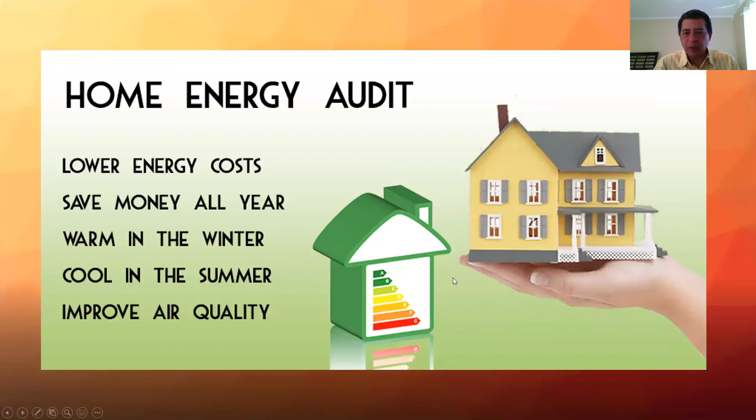The first thing he or she will expect is a lot of questions from the energy auditor, because the owner is the one that knows the home better than anybody else. So one of the things the energy auditor will do is first have a conversation with the homeowner, asking if he or she knows areas that were ventilated, which areas of the home are colder or hotter during winter or summer time, things of that nature.

Once that's done, the auditor will do a physical inspection of the home. He'll do a walkthrough outside and inside. Everything has to be accessible. Every single room of the home should be accessible - attic, basement, bedrooms, everything. Every area of the home has to be accessible to the energy auditor in order to have a quality audit performed.

They should also expect them to have some equipment like the blower door, for example. The blower door is just a big fan that they put at the main door. What that does is put your home in negative pressure. It's like having - don't be afraid of what I'm going to say - a 50-mile-per-hour wind coming inside your home. You're not going to feel it that much, but that's the pressure we bring your home into. So what that does is pull air out from inside your home.

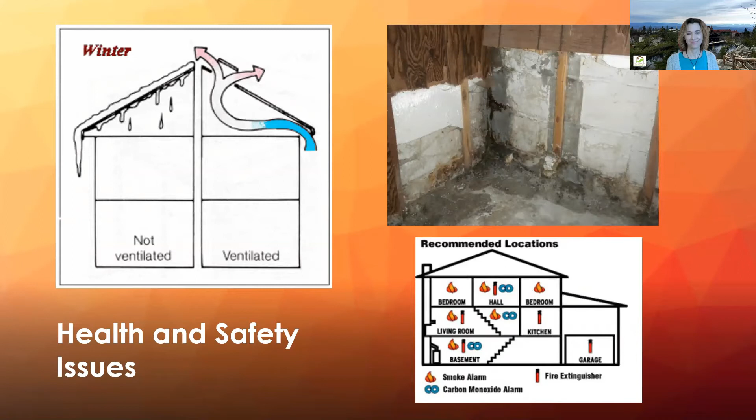Well, ventilation is part of the whole assessment. And yes, you're right about that. That's the popular saying, my home needs to breathe, right? We all need to breathe air. Well, the home needs to do that, but to a point where we have to give that breathing of the home in a way that is healthy for everybody.

So when you do, like in the picture that you're showing there, in the winter, all that dripping in air and things like that, that is because the moisture inside your home that we generate every day when we take a bath, when we cook, when we even breathe ourselves. We're generating moisture that goes with the air somewhere, and it's that movement inside the home. So when you have infiltrations between your living area, which is the envelope that we're going to talk about later, and it goes into another area, and there's condensation, well, it creates things like the one on the left, where all this dripping is going, the water is condensing, water gets there, then that contributes to mold-like substances and things of that nature.

The one on the right has proper ventilation where everything moves, the air goes, there's a seal, there's no connection between the home and the cold area of your attic, but that area is breathing and moving all the air. So those health issues like the one on the left are addressed. So yes, ventilation is part of that assessment, not only the energy, but the health part of it.

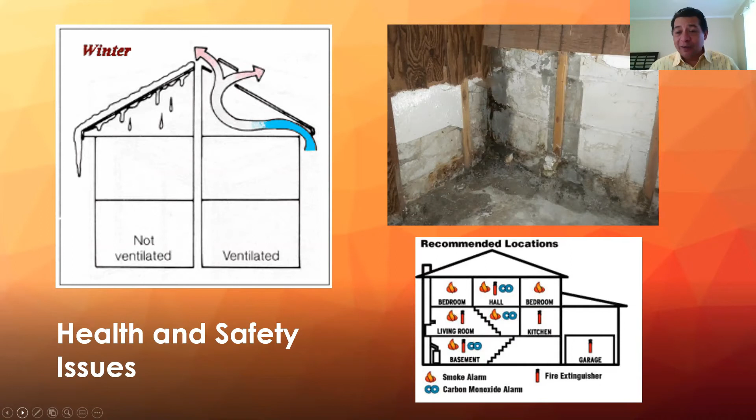Right, and that's only one part. We could talk all day long about it, Marcia, I know, but we don't have time for that. All right, let's go on to our next slide.

And when I say holes, I don't want people to believe that they have big openings in the roof or things of that nature. But basically, that's what it gives us, those little holes that when you add them up, is where the air gets into your home or gets out of your home, depending on the circumstances.

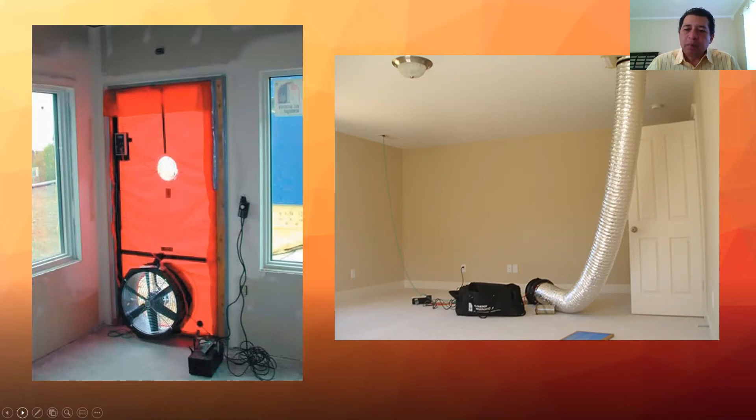What it's showing is where the hot and cold spots are in your home. If it's cold outside, when you do the infrared camera, it will tell you that. By the way, most of these are done while you have the blower door running, because you want to create that difference between the outside and the inside of your home. In general, the greater the temperature difference between outside and inside, the better picture you get of what's going on in your home.

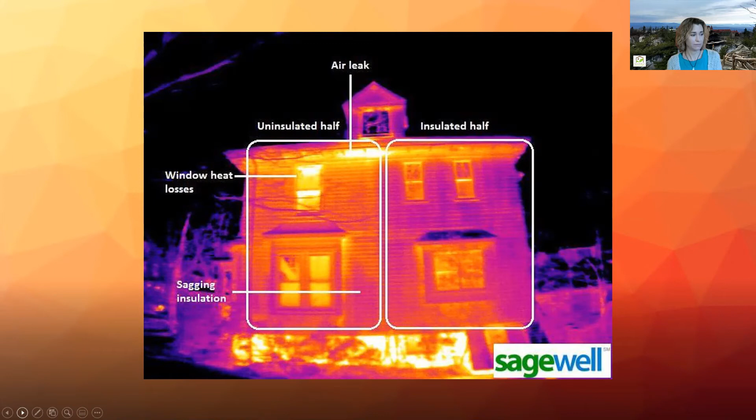So that says the hot air inside your home is heating your walls. Shouldn't be heating your walls, right? It should just be hot inside your home. So that tells us those walls most likely have no insulation. They have a lot of air infiltration because the heat is going through all those holes we're talking about into the wall and heating that wall, and not only heating the wall but also escaping to the outside where it's colder, because that's physics. Heat goes from the hotter area to the colder area, works that way every single time.

So you can see the giant air leak here, air leakage in there, it will blow in there. And if it's cold air, that thing will be very, very cold, very dark, like a dark spot, because it's cold air infiltrating. Most likely this one was done in the summer because it's hot air that's coming in there.

On the other side you see the difference of color, right? The other half, insulated, is more like a purple, darker color. That tells us the walls are colder than on the other side, which means the heat is not moving through as fast. So the heat is staying inside your home.

And this, I want to point to the windows. You see the windows? What color are they? They're orange, okay? Why? Because windows, going back to the same thing, they're not great insulators. They're not great at holding the heat inside your home, because they're not.

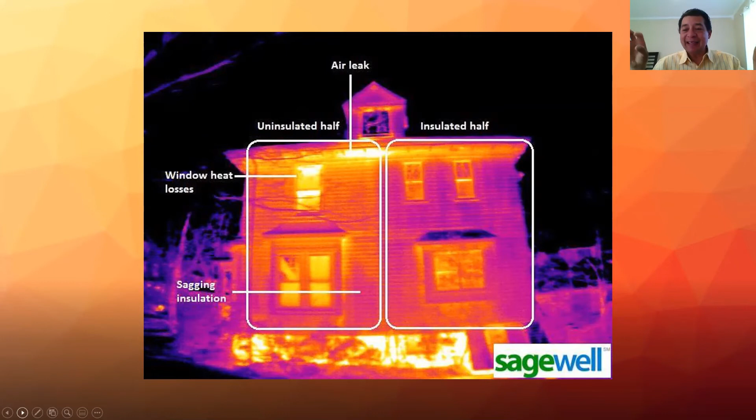So what we do in a practical sense is we block off those easy exits for the air, so the air stays in your home.

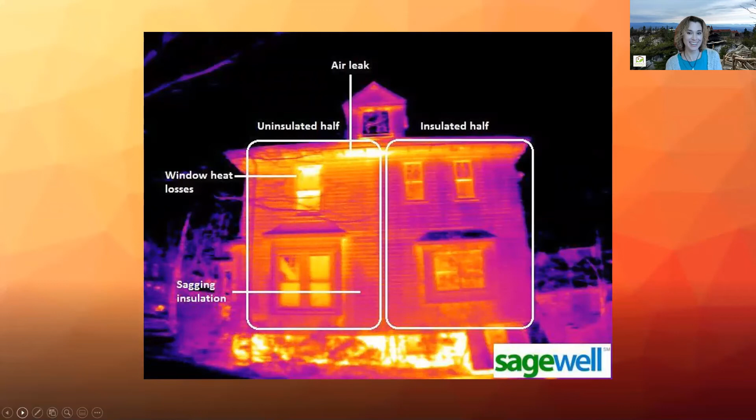Let's go on to LED lighting - what an easy improvement that you can make in your homes, and save so much.

I can tell you that I changed out all my halogen bulbs and incandescents for LEDs, and I've saved in just one year like $120. Easily paid for all of those bulbs. And if anything of all this, everyone right now listening to this should be doing this. Go through your home, look at how many light bulbs you have, and just do this investment. I assure you that by doing it, it's going to pay you back 100-fold in energy savings.

Nowadays LEDs are so inexpensive. It's not like it was at the beginning when they were coming up, when an LED light bulb was $20 for only one light bulb. Now you find light bulbs for $3, $2, $5, $4, depending on the light bulb that you want.

But if you want to do an improvement right now that will help you, and I agree with you Marcia, let's just do that - change your light bulbs for LEDs, and that will help you immensely. And all those factors - longer life, eco-friendly, energy efficient. On top of that, you're helping the environment because you're not wasting more energy. We're not burning coal, we're not doing a lot of things, because less energy is being used in your home. So yes, LEDs, I'm all for it.

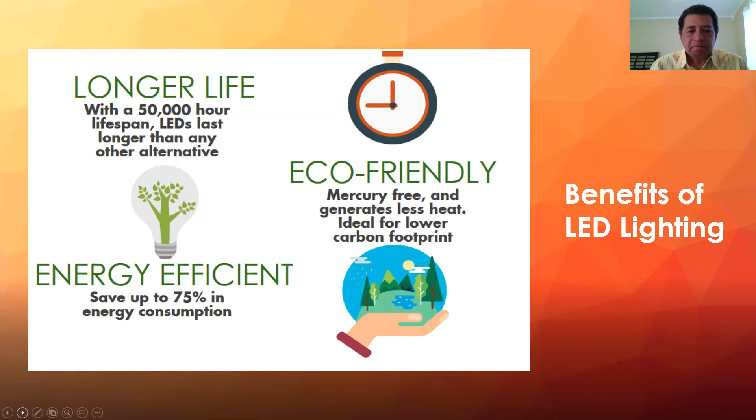Yeah, and you can go on Amazon - I think it was 10 or 12 of the replacement bulbs for the recessed lights that I had in my home, and it was like $68. It was really inexpensive compared to what they used to be. So definitely check that out.

All right, we're going to have to go through this really quick because we don't have a lot of time left. People may hear the terms HERS and HES and wonder what that is. Well, this is just a system that tells you how efficient your home is. HERS was done by the Residential Energy, the ResNet network. It tells you how energy efficient your home is. In this system, when you hear HERS, the lower the number, the more efficient you are.

With HES, that comes from the Department of Energy, and that's vice versa - the higher the number, the more energy efficient your home is. Basically both of them just give you an idea of where your home is on energy saving. So if you hear about this, just know that with HERS, the lower the number, the more energy efficient it is, and with HES, the higher the number, the more energy efficient it is. Now, is this a number you're going to get after a home energy audit is performed? No, we don't provide these numbers.

But what we do is tell you, you're going to have a lot of energy savings, and we will project what that will be based on your own consumption.

I'm curious, if somebody wanted to know these numbers for their house, how would you get them? Do you have to hire a ResNet rated auditor? Yes, sometimes you do, but what they do is a brief evaluation of your home and give you a number. They're not auditors doing a full audit, they're just evaluating where your home is, and then they assess what that is.

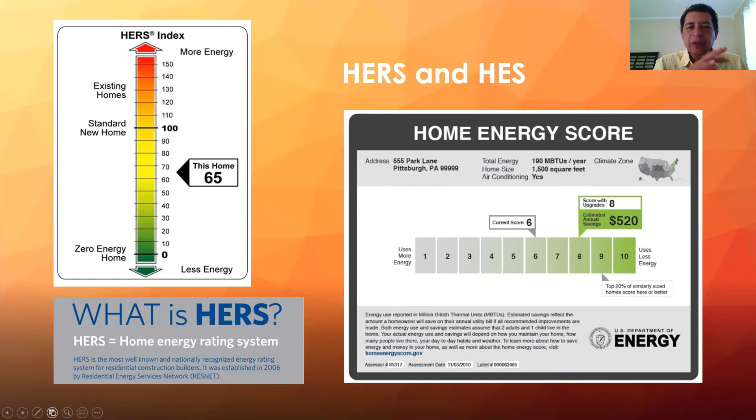And if somebody weren't able to get the free service, maybe because there's a backlog and they don't want to wait around, they can hire an auditor. What typically would that cost? The cost runs between $400 to $700, depending on the house size and everything, but that's the average.

So that would be equivalent to if a buyer is buying a new home and doing a home inspection. That's very typical for that range to have a regular home inspection done. So as a realtor, I would tell my home buyers to just plan on saving that money and getting the home energy audit done right from the get-go if they don't want to wait around for a free one.

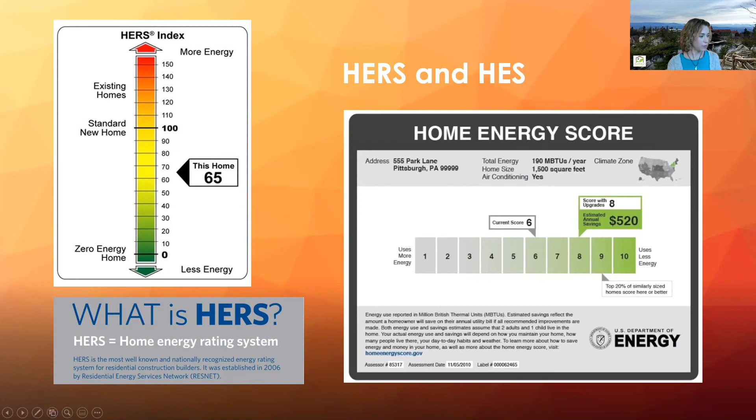Yes. All right, great. We are moving on. So here's something.

This is every place where there's a joint in the home where it was built, there is a hole, because nothing is completely sealed. New constructions are moving toward making homes very tight, meaning those air escapes are minimized. That's where they evaluate if mechanical ventilation is needed, because the home needs to breathe and air needs to move around.

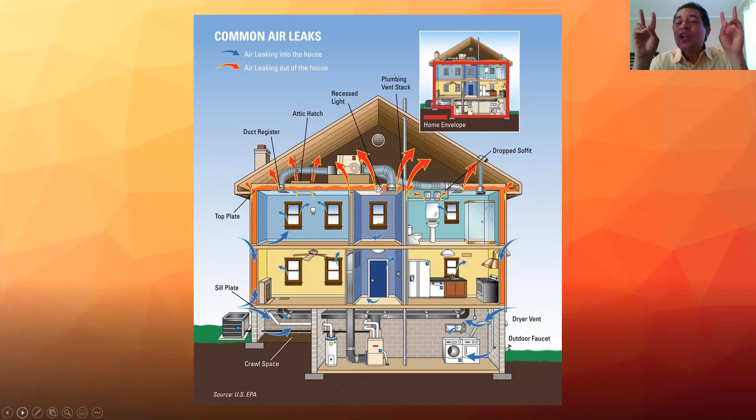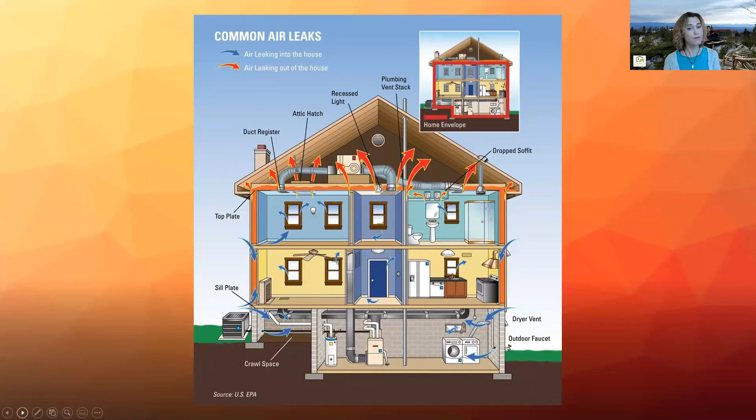All right, so this is kind of part two, because this assumes the energy audit is over and you know the health of your home, and you know where all your leaks are. And now we get into the weatherization part. This is the actual work part. We're going to fly through these next slides so we can get through them all. We're going to talk about things that can be done.

But first, we have a great graphic here that shows that 64% of every household's costs are for your energy of heating, right? Space heating. So I don't know if you want to just say a few words about this.

Very quickly, a lot of people don't think about hot water as a contributor to that heating, but it's part of heating because you're heating your water. So if you see just those two elements there, you're talking about 80, what, 84%, 82%? Yeah, it's high. But yes, there's other contributors like lighting. That's why I say, if you change to LED, you will have some savings, almost 10% of it.

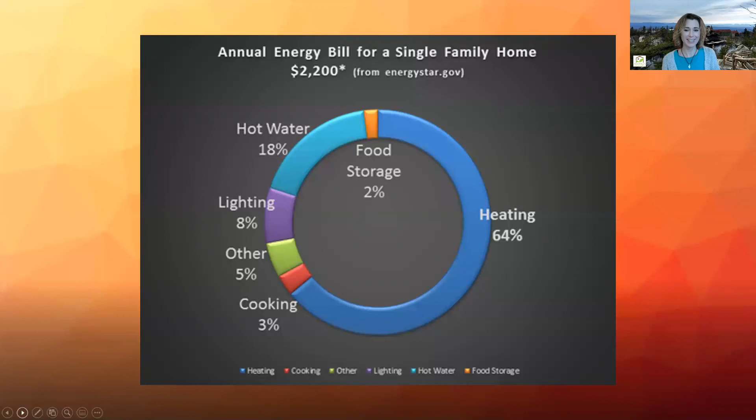Yes, that gives you a great picture of where your heating, your energy, is living. And that's why we are sealing all that, because the more we make that, the less we make the heating systems work, the more you're going to be saving, because there's not going to be wasted fuel on that. All your heat's not going to be escaping through all of those leaks, and all your air conditioning is not going to be going out.

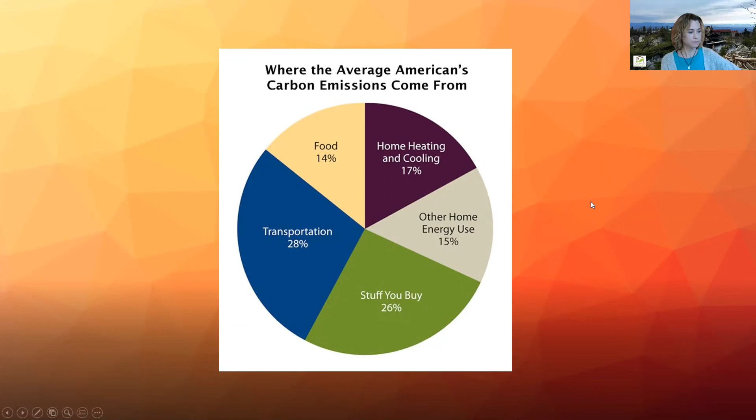So this is another reason why weatherization is important, is that you're reducing your home's carbon footprint by making it more efficient. That's something that we mentioned at the beginning, and that's true.

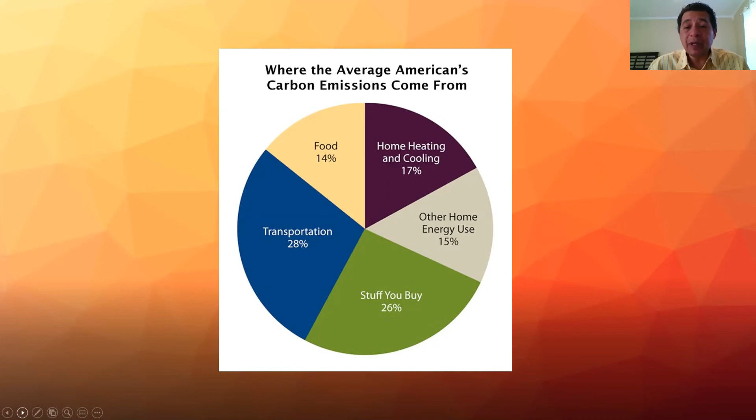Your energy usage, all that contributes to this pie of reducing carbon emissions, and also what we talk about with climate, right? Climate, heating, and everything that we're going to discuss right now. So if we do our part, we're going to be contributing to that. So that's great.

We will put some door sweeps in there. All that is doing is preventing air from escaping from inside your home to the outside, or vice versa, from the outside to the inside. Because again, during summertime, the hot air wants to come into your home. During wintertime, your hot air inside your home wants to get out. Right, so that's what it will prevent. So we're putting a barrier there.

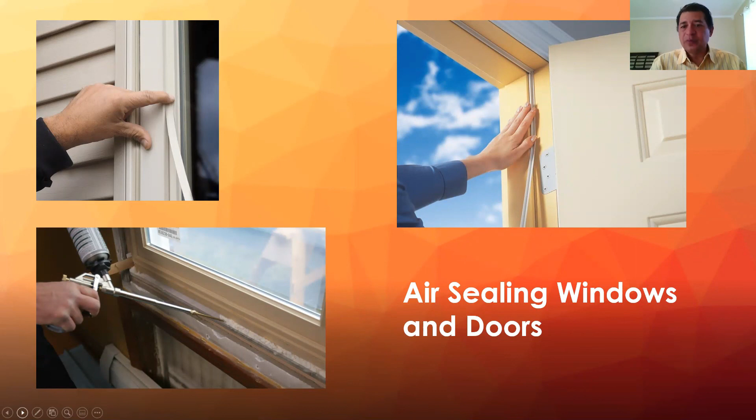And when you do that, if you document like you mentioned, then you will have proof that it was done in your home. Exactly. So here are a bunch of different things that can be done, some professionally and some you can actually do yourself.

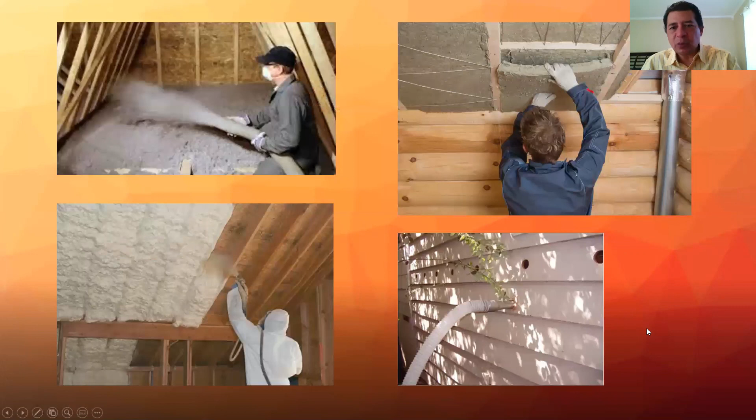That's insulation - this is the one everybody hears about. There's different types of insulation, like blown insulation. We do dense pack, like in the bottom right, where we drill holes into the home - don't be afraid of those holes, they get plugged back. We put plugs back in and put the siding back in, so you won't even see any of this. But again, it goes back to what we say - a lot of things you won't see after we're done, but it was done, and you will see where it was.

On the left bottom there's another type of insulation, spray foam - that's very expensive, by the way. It's not commonly used, but depending on the condition of the home, we sometimes call it a hot roof, where we want to leave the roof in the attic and make the attic part of that envelope we mentioned before, because it's more cost efficient, since there's equipment in there like heating equipment. So it's more practical to put it inside the envelope than outside. But that's a determination we make when we do the audit. So these are different insulation techniques we do as part of the home audit, and which one we use will depend on your home.